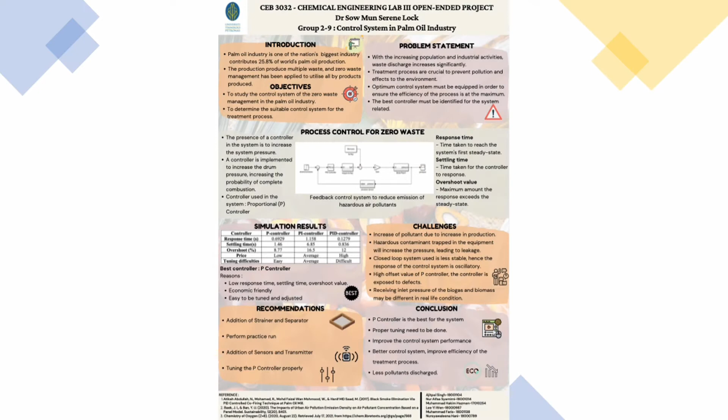First, the introduction. Palm oil was first introduced in Malaysia in 1875 and has since become one of the primary industries in the country. The palm oil industry is one of the nation's biggest industries and contributes up to 25.8% of world's palm oil production. The production produces multiple waste, and zero waste management has been applied to utilize all the byproducts produced.

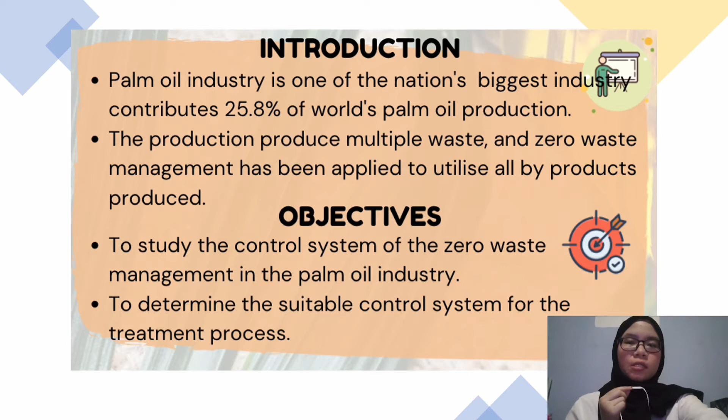Next, the main objectives of this study are to study the control system of the zero waste management in the palm oil industry, and to determine the suitable control system for the treatment process in the palm oil industry.

Next, the problem statement: due to the alarming growth in population and industrial activities, waste discharges have increased significantly. Therefore, treatment processes are crucial to prevent pollution and effects to the environment. Optimum control system must be equipped in order to ensure the efficiency of the process is at the maximum, and the best controller must be identified for the system related.

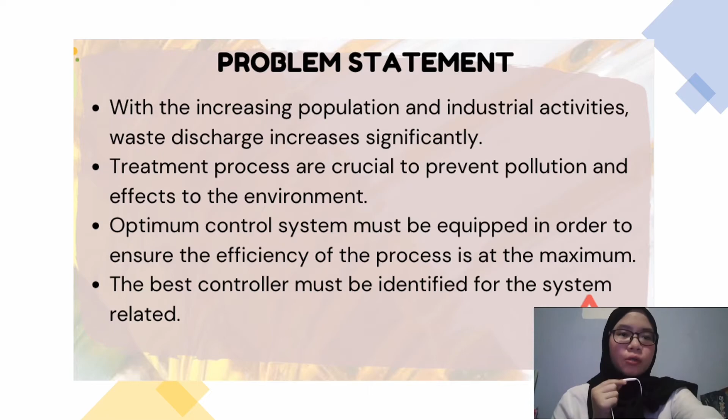In this research, we will be talking about how the implementation of a pressure controller will be able to reduce the emission of black smoke through the co-firing of biogas. This black smoke consists of different air pollutants such as greenhouse gases or other particulates which is not environmentally friendly, and we need to avoid it.

So we will use a pressure controller to increase the drum pressure and to reduce the density of the effluent. This process control involves a pressure controller, a pressure transmitter, a pressure sensor, and a valve.

The objective of this process control aims to maintain the drum pressure at 1800 kPa by adjusting the inlet flow rate of biogas. The disturbance was found to be the flow rate of biomass that will affect the pressure of the steam. Since this control system is a closed-loop control system, it works automatically without human interaction.

Here is how it works. When the drum pressure drops below the set point, the pressure sensor will sense the difference and transmit a signal to the transmitter. The transmitter will then send a signal to the controller to adjust the opening of the valve until the drum pressure reaches the set point.

In order for us to determine which type of controller to be used, we run a simulation between P, PI, and PID controller, and we will compare them in three different aspects, which are the response time, the settling time, and the overshoot value.

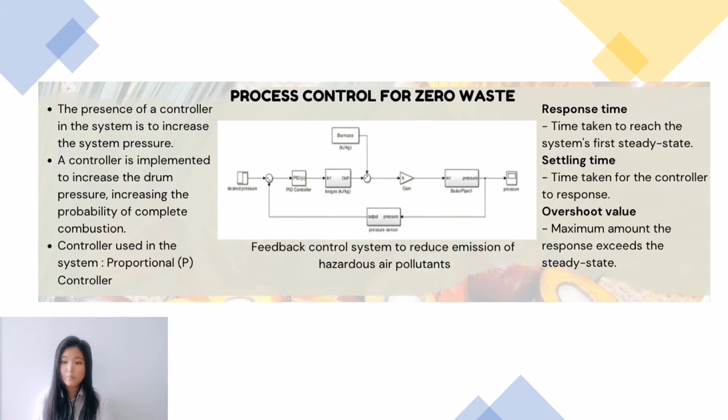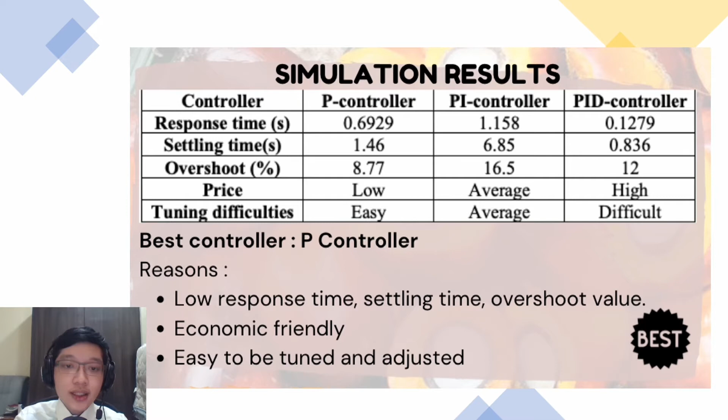So for the simulation, we use three controllers: P controller, PI controller, and also PID controller. From this, the best controller that we choose is the P controller, or also known as proportional controller. This is because it has low response time, settling time, and overshoot value. Secondly, it is economically friendly. And lastly, it is easy to be tuned and adjusted.

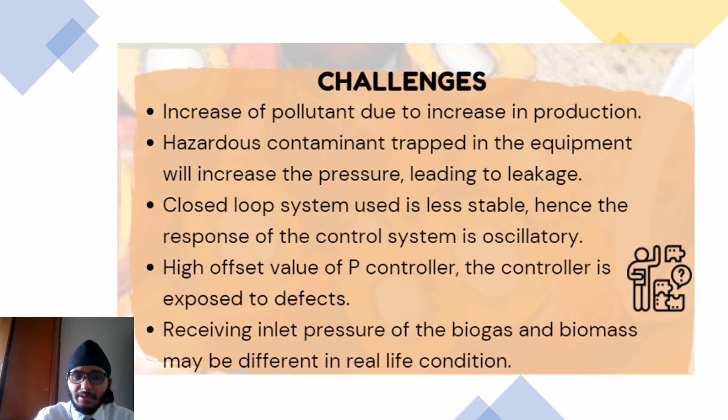Finally, the receiving inlet pressure of the biogas and biomass may be different in real life conditions. This is because biogas and biomass tend to have distinct characteristics which may affect the system.

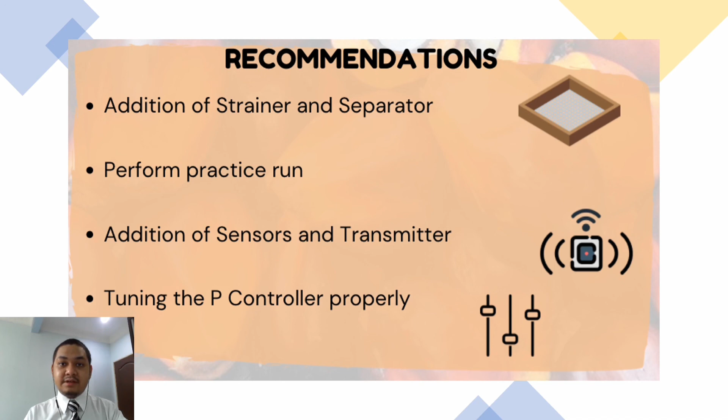From this lab project, students can conclude that the control system involved in the palm oil industry is very important in order to practice zero waste management. We can conclude that the best controller to be used in the treatment processes is the proportional controller. However, it needs to be properly tuned to get its maximum efficiency. With a better control system, we can improve the efficiency of the treatment process, hence less pollutant will be discharged to the environment.